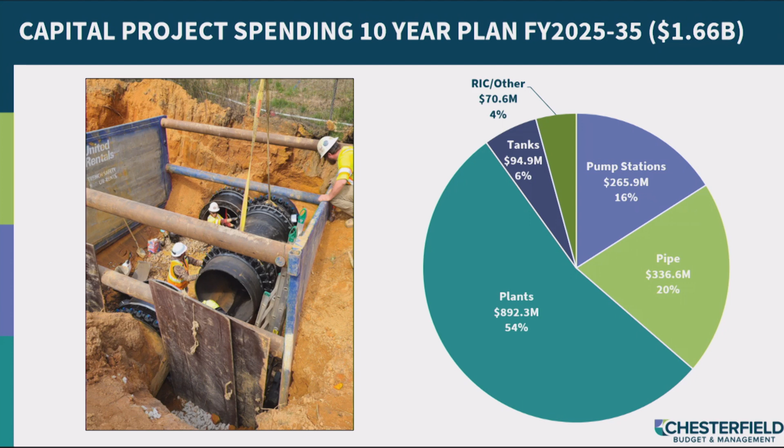The Department of Utilities has established strong financial policies to ensure adequate funding to meet future infrastructure expansion, replacement, and maintenance needs. Mr. Holland made a comment on the last presentation about our bond rating. Mr. Holland, you'll be happy to know we checked as of this month: we're one of only 9 water and wastewater utilities in the nation that have a AAA bond rating. So the group continues to get smaller, which makes us even more proud of that accomplishment.

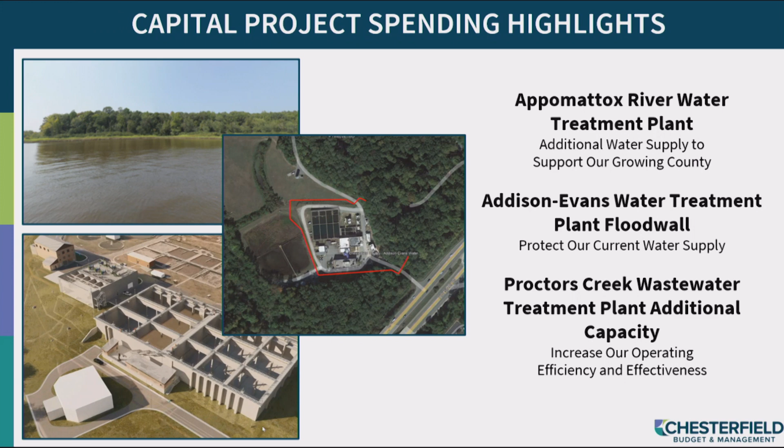This year, I briefly wanted to take you through some of our more exciting, larger projects that we have planned for the county. The first is the Appomattox River Water Project, which is our 4th water supply. We also wanted to touch a little bit on the Addison Evans Water Treatment Plant flood wall, as well as plans we have to expand the wastewater treatment capacity at our Proctors Creek wastewater treatment plant.

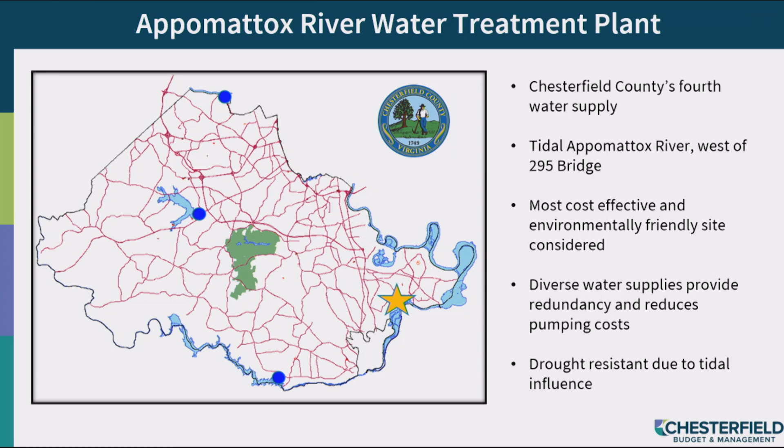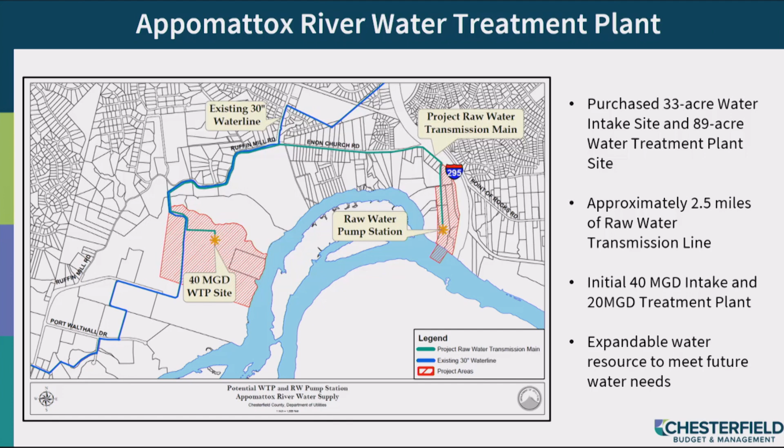To give you an update, we have obtained our Virginia Marine Resources Commission permit to construct a 40 million gallon per day intake in the tidal Appomattox River with screening facilities that are protective of both the environment and the fisheries. We also have obtained our DEQ Virginia Water Protection Permit. Those permits are 15-year cycles. In the first 15-year cycle, we've been permitted to withdraw 29.8 million gallons a day.

The current schedule has the 4th water supply online producing water in the year 2033. That first phase of the project would be a 40 million gallon per day withdrawal from the river. The first sizing of the treatment plant would be 20 million gallons a day with a price tag of $426 million just for that first phase.

Going back to this slide, I also understand that the board has received some questions on this supply, especially since it's located in the tidal portion of the river. Some of our customers have asked, are we concerned about salinity in this portion of the river? Just like our customers take water quality very seriously, so do we.

As part of the permitting process for the Appomattox Water Treatment Plant, the Department of Utilities contracted with the Virginia Institute of Marine Science to conduct a very sophisticated fine-resolution particle tracking model that was completed in March 2022 as part of our application process for this plant.

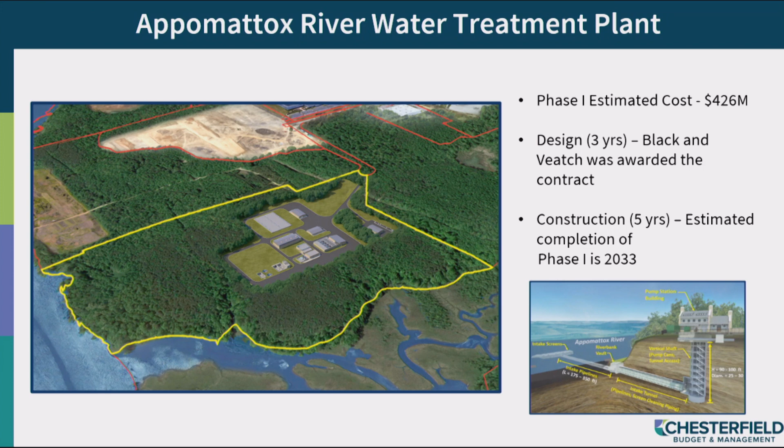The next project I'd like to highlight is the Addison Evans Water Treatment Plant Flood Wall Project. Addison Evans was built some time ago in 1967, and it was actually constructed at the lowest point around the reservoir. It was actually constructed in a floodplain before the floodplain was even defined. The plant has experienced flooding as early as two years after construction, and as this board knows, over the years we've had some serious flooding at that facility.

The facility is extremely important to the county and utilities. It is a 12 million gallon per day conventional treatment plant that supplies about 15% of the county's water, serving a population of about 50,000. So again, a very important component of our infrastructure.

The flood wall will consist of constructing a 1,500-foot flood wall around the plant to protect the plant and the reservoir as a long-term water supply for Chesterfield County. The wall we're constructing is actually 5 to 18 feet tall, depending on the topography of the land. But because the treatment plant is in the bottom of the bowl, the top elevation of the wall will only be 18 inches above the normal pool elevation of the reservoir. Therefore, we don't see any view shed issues. We also have designed the wall to be 2 feet higher than any historic flood at that facility.

Design is currently complete, and we're awarding the contract. The contract has been awarded to Kokosing Industrial, and construction is anticipated to take about 2 years. The cost of the project sits at $21.2 million, but we were fortunate that our staff were very aggressive in applying for every and all grants for this project, and we successfully achieved a grant for $8.7 million to help with the cost of this project.

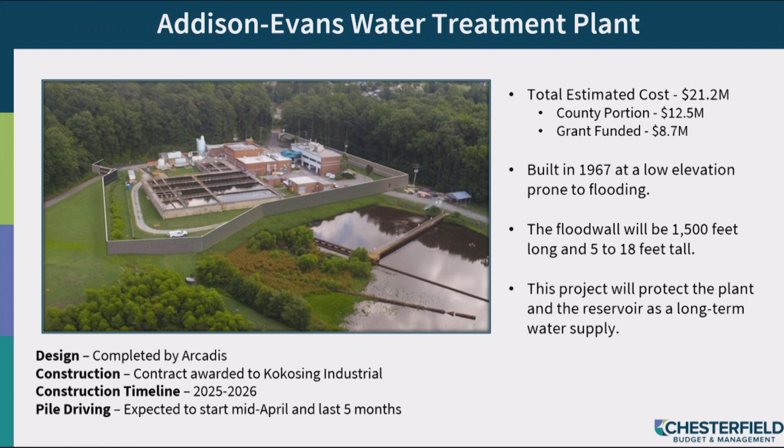The last project we want to talk about is the Proctors Creek Wastewater Treatment Plant Expansion Project. The Proctors Creek Wastewater Treatment Plant opened up in 1975 and serves a significant portion of the county. Its current capacity is 27 million gallons a day. Again, as the county continues to grow and develop, we need to make sure we have enough wastewater capacity in the county.

The first phase of the expansion of the wastewater treatment plant at Proctors Creek will involve the construction of a flow equalization basin. The second phase will be expansion of the actual treatment trains at the facility to be able to physically treat more waste. The ultimate goal on that second phase is to expand that facility from 27 million gallons a day to 54, doubling the capacity of that facility.

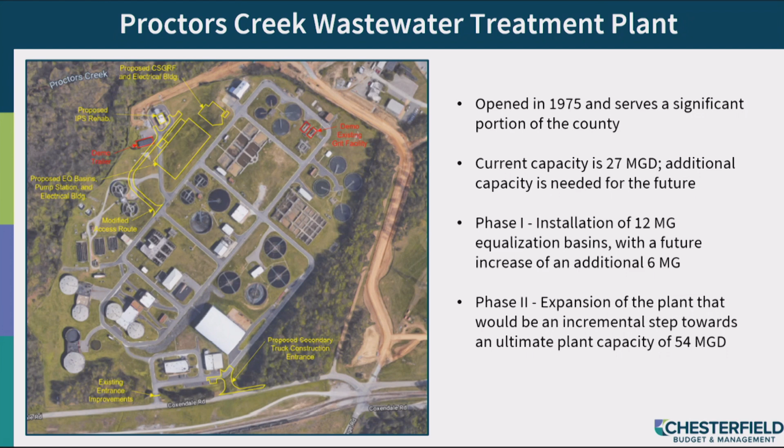The equalization basin acts as a shock absorber. At our wastewater treatment plants, flow doesn't come in on a constant basis—we have diurnal flow patterns. When people use water in the morning, we get hit with higher flows, and again when they come home at night. That pattern creates issues from a treatment perspective, both for hydraulic loading and pollutant loading. These basins shave off the hydraulic peak and act as a shock absorber for pollutant loadings, since the waste is mixed within the basin. We can then slowly feed that wastewater into the treatment process for a more consistent waste, allowing our operators to dial in the treatment process and save on operational costs.

The project also includes new coarse screens and improved grit removal, which will help protect downstream equipment.

The initial available equalization basin will be 12 million gallons, with 6 million gallons planned for expansion sometime in the future, for a total of 18 million gallons.

To give you an idea of the size of this facility, it's the size of a football field, 40 feet deep. These are just huge facilities.

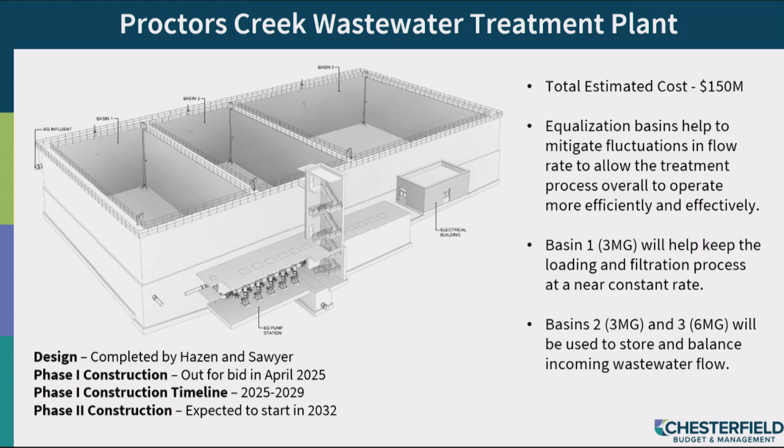The design is complete for this. We anticipate construction to take 4 years. We're going out to bid in April, and the construction of the basin has a price tag of about $150 million. Further expansion of the plant with new trains will start in the year 2032.

With that, I'll turn it over to Kathy to go through the rates that are going to support these planned projects. Yeah, George spends and I collect.

As George said, our capital project budget is about $1.7 billion over the next 10 years, and we contracted with rate modeling agency Stantec to review what our rates would need to be over this period to pay for what we anticipate we need to do, so that citizens have that steady, clean, safe water supply.

This is a slide we show pretty much every year. This is our average residential customer who uses 7 CCFs of water, roughly 5,250 gallons. This would be a 5% increase in our rates based on the customer charge, the capacity charge, and the volume or usage charge for our customers. You can see the breakdown between the water and wastewater increases between the two different sources.

The monthly bill would increase $2.76, which is 4.24%. But I want to point out, affordability has been a big topic in today's meeting. This is our first look at affordability when we're proposing rates working with our rate model. The CPI for the water industry in calendar year '24 went up 5.81%. So our proposal at 4.24% is our first gut check that says what we're proposing is reasonable for our customers, that we're not asking for large increases.

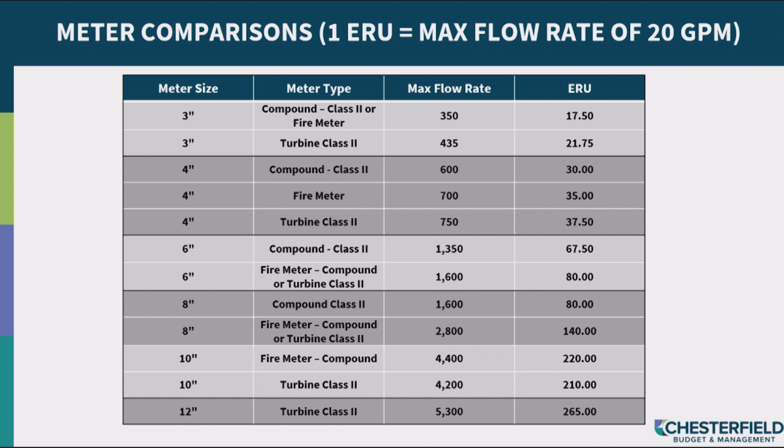So this is a paradigm shift for utilities. We pretty much have always gone just by the size of the meter. Now we're doing a size and type meter, based on an American Water Works Association standard. That's how we've come up with these ERU amounts.

The next area where we've looked at our fees is installing service lines. Typically, the developer installs the service lines. If it's a one-off house, they'll ask us to do it, but they can get another contractor—it's not that we have to do it. If they ask us to do it, we are going to increase our service line charges for installing a 5/8-inch meter. The current charge is $2,800 and the proposed charge is $3,900.

It's based on the actual cost of the labor and materials. We hadn't increased it since July of '22, so this isn't a year-over-year increase—this has been an increase based on several years.

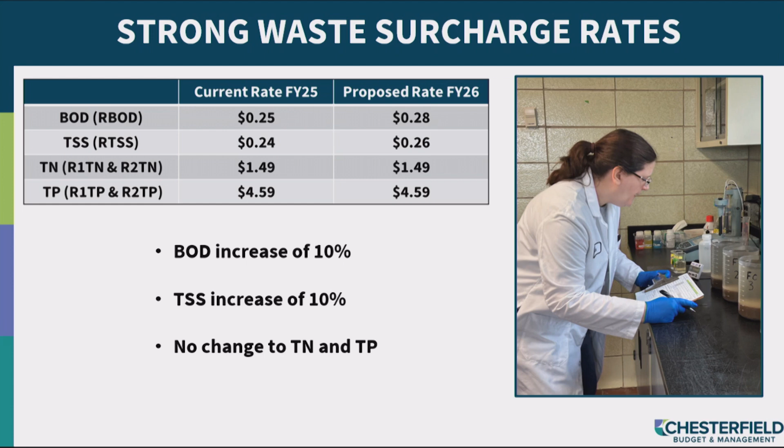And just a reminder that we do have a public hearing scheduled for our utility rates on March 26th, and our budget would be included in the adoption at your April meeting.

We want to, again, thank you so much for your support. What you have done for us is amazing, and we really appreciate that you give us that attention to come to our staff meetings and encourage our staff, and that you recognize the people who think they're just doing their jobs, but in every other locality, they're going over and above, and to them it's just like normal.

And so it's great that you guys can recognize them for doing that, over and above what they think is so normal. We're really proud of our accomplishments, and we're really looking forward to some of these projects we showed you today. We have some significant investments coming.

So while yes, we're coming forward asking for rate increases, you saw the projects he gave, you saw the projects we're going to do. As we continue to grow, we're going to run out of capacity. We need these. We need to be so far ahead of the curve because, as George pointed out, it's 3 years to design, 4 years to build. It's just like the whole school thing, you just got to be out, you got to be planning out in front of the curve.